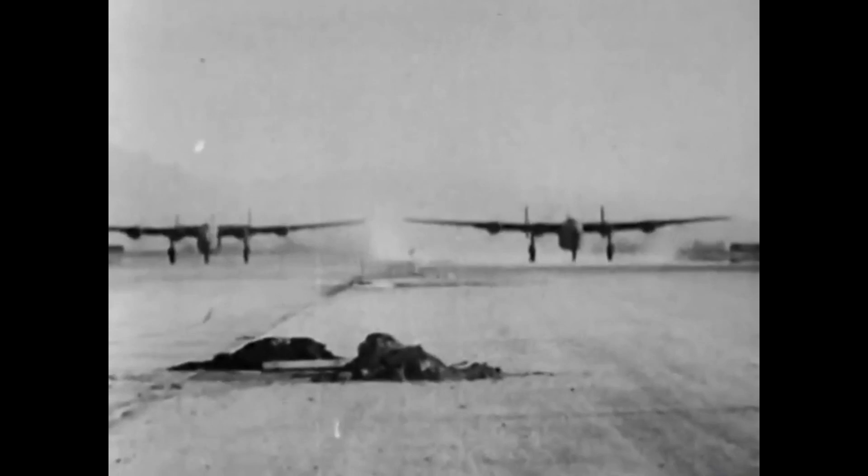A heavy bomber squadron takes off on a long-distance operation against the enemy. Flying with great speed at high altitudes, they avoid detection, drop their loads, and are off for home before enemy fighters and pursuit planes can possibly climb 25, 30,000 feet or even higher. In these cold substratosphere regions of the sky, where the air is so thin, it affects engines as well as men, the fastest enemy planes are no match for our B-17 or our B-24s, which return safely to their bases.

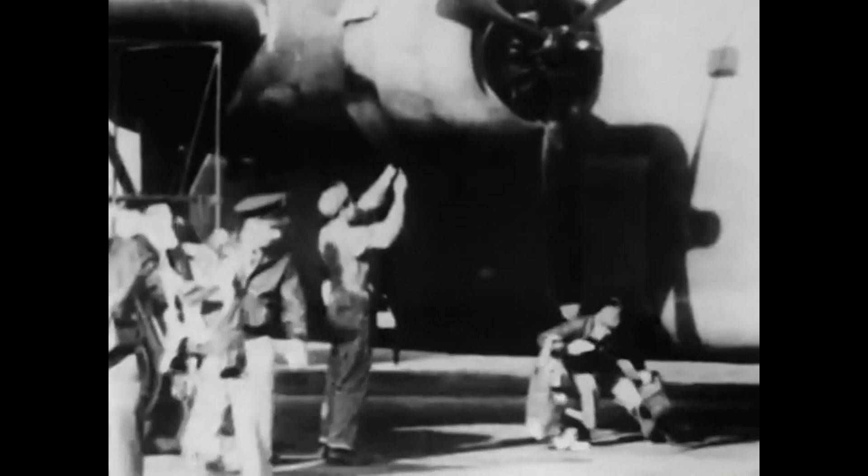Air supremacy is a vital factor, perhaps a deciding factor in this war. The achievement of air supremacy involves speed, personnel, firepower, and maneuverability.

But one of the most important factors is the ability to achieve maximum altitude without the loss of power. The Civil War maxim of getting there fastest with the mostest men can be revised in terms of military aviation to getting up higher with the mostest fighting power.

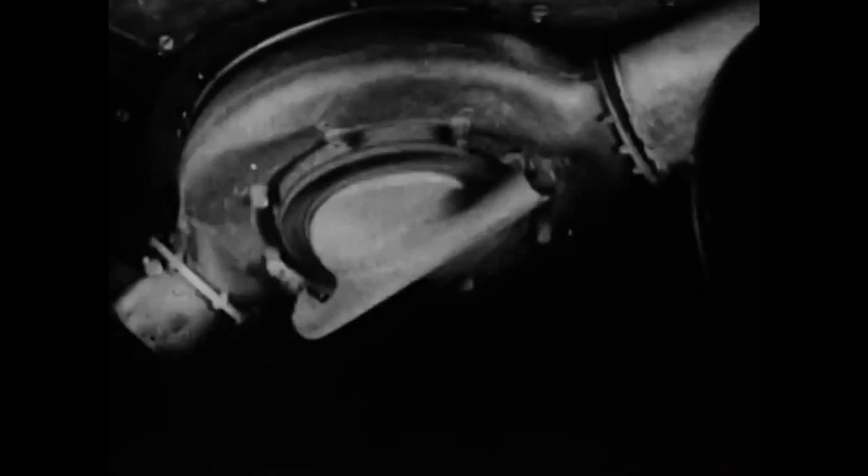This master of the skies, the dynamic turbo-supercharger, is the reason for our air superiority at high altitudes. For the year 1940, the Collier Trophy, one of the highest honors in aeronautics, was awarded jointly to Dr. Sanford A. Moss and the Army Air Forces for 25 years of collaboration in perfecting the turbo-supercharger, which is playing a leading role in sweeping our enemies to defeat.

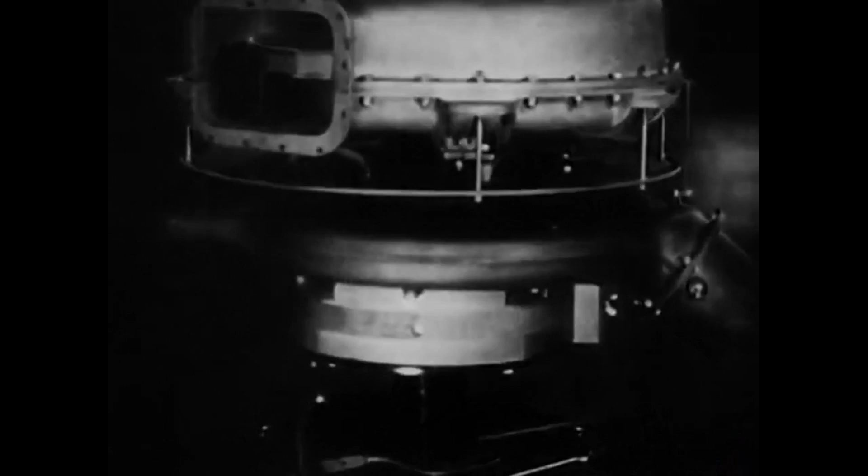The turbo-supercharger makes possible high-altitude flying with full engine power. An airplane engine derives its power from explosions of a mixture of air and gasoline. At altitudes above sea level, the air gets thinner and thinner. Therefore, these explosions get weaker and weaker.

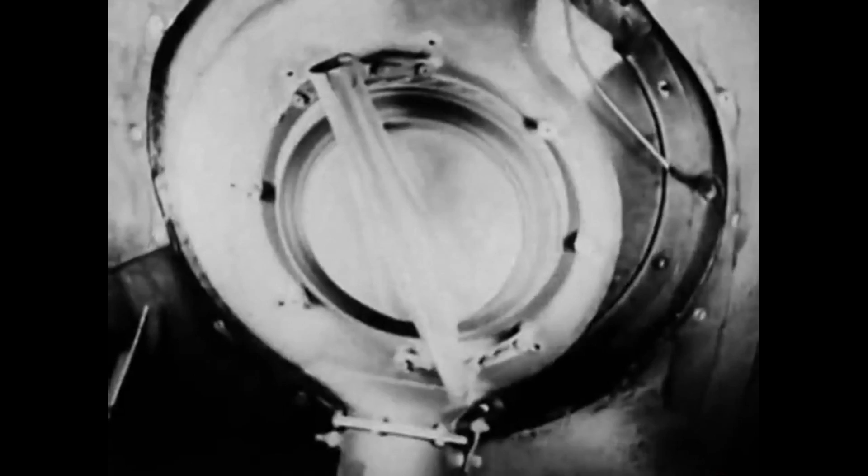At 20,000 feet, an unsupercharged airplane engine gives but one-half its normal power. At 35,000 feet, only a quarter of its power. The turbo-supercharger counteracts this loss of power by compressing and cramming air into the engine, thereby maintaining proper manifold pressure to give full power at high altitudes.

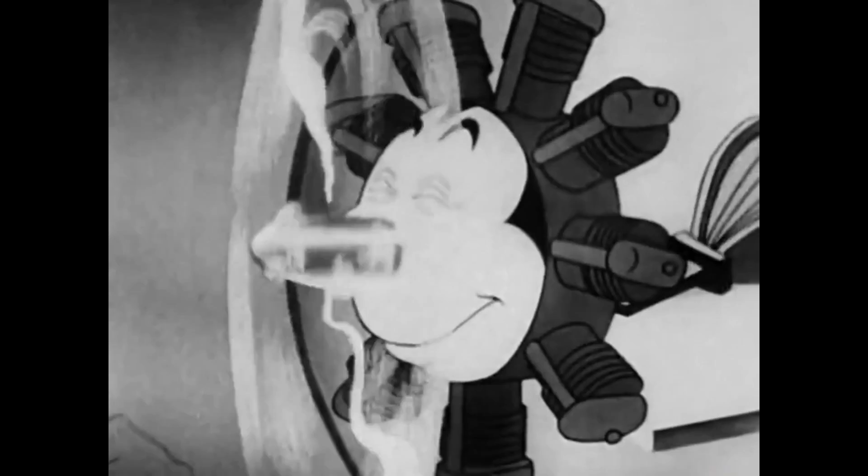It performs the same service for engines that oxygen equipment performs for pilots, kidding the engine into thinking it is always working at sea level. Without a turbo-supercharger, the engine gasps for breath.

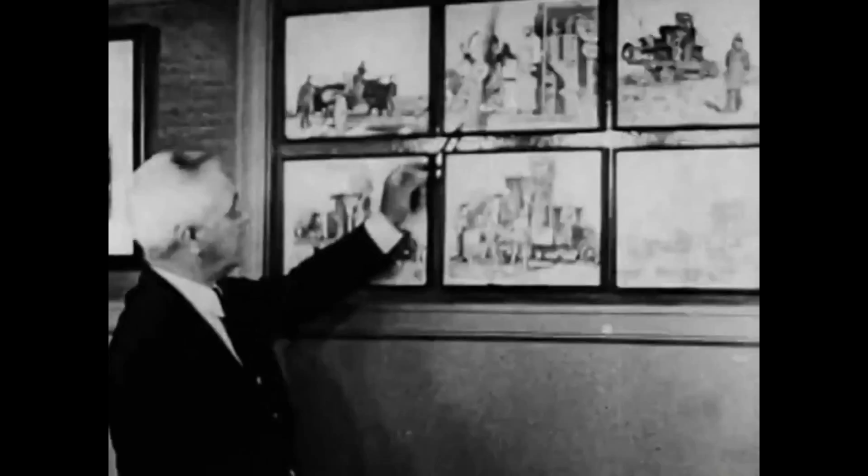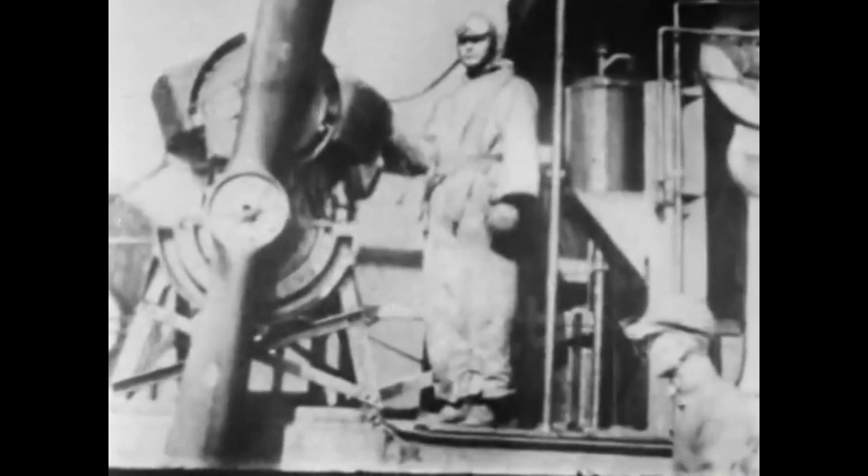During World War I, the first model turbo-supercharger was tested under great difficulty, on a truck at the summit of Pikes Peak, 14,100 feet above sea level. The Liberty engine developed 400 horsepower at sea level, but moving up to 14,000 feet, it dropped to 265 horsepower. Then the turbo-supercharger not only boosted it up to 400 horsepower, but to 410, or 10 more than normal at sea level.

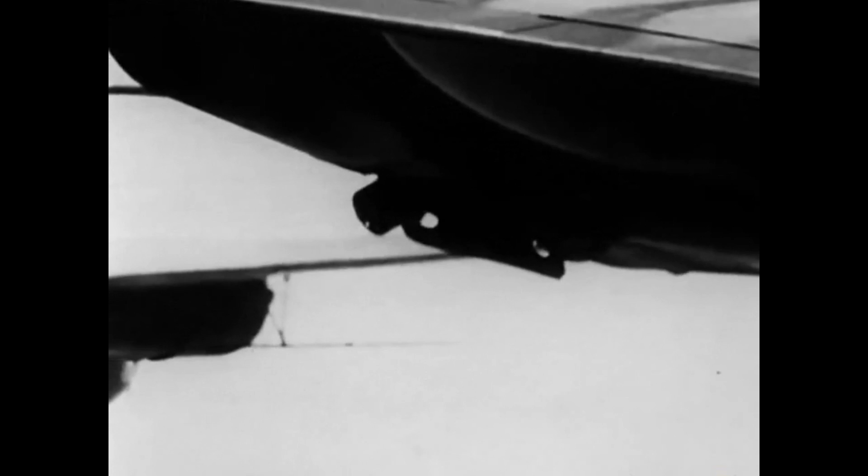The turbo-supercharger has demonstrated its worth in actual combat all over the globe. Our great bombers, the Boeing B-17 Flying Fortress and Consolidated B-24 Liberator, together with the Lockheed P-38 Interceptor, the P-43 Lancer, and the deadly Republic P-47 Thunderbolt, are all turbo-supercharger equipped, which enables them to fly and fight effectively at great heights above the earth.

Our turbo-supercharged interceptors and pursuits can get on top and stay on top of anything the enemy has to offer. These tactical advantages are the key to air supremacy and ultimate victory.

Turbo-superchargers permit our bomber pilots to avoid bad weather, even storms, by climbing over them, making it possible to fly at altitudes and speeds which result in maximum engine efficiency.

Obviously, we have a decided edge when we can bomb the enemy with a minimum of danger to our planes and personnel. Flying turbo-supercharged planes, our boys have bombed enemy objectives with amazing accuracy from heights where they were invisible and unheard from the ground. There had been no warning sirens, no opportunity to take shelter, only the sudden, supreme, and paralyzing flash of falling out of a clear sky.

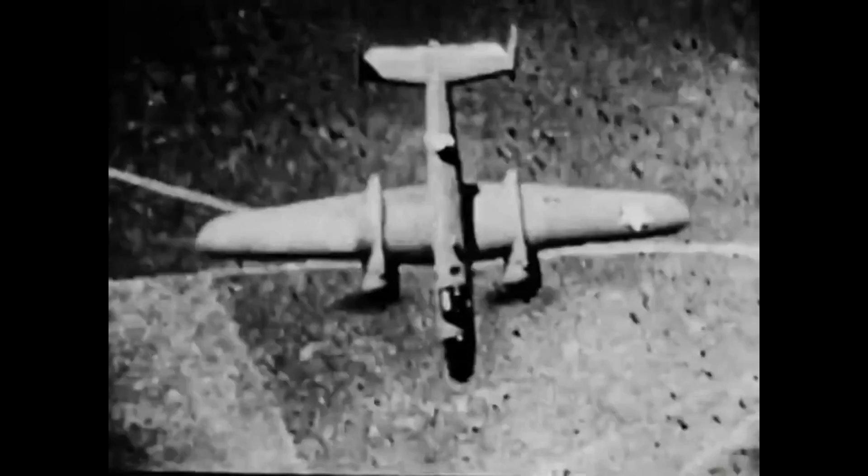All combat planes are equipped with gear-driven superchargers, which are built into the engines and driven from the engine crankshaft. These geared superchargers are effective up to medium altitude.

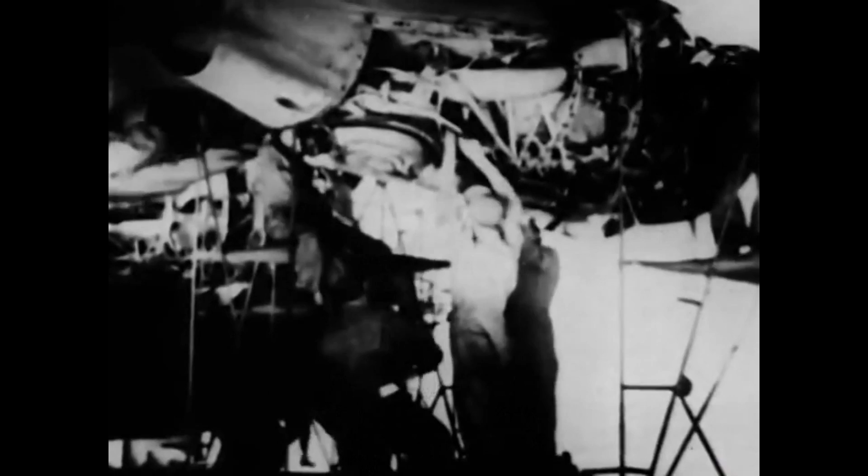At high altitude, the turbo-supercharger is needed to provide additional pressure to maintain full engine power. With proper care in installation, maintenance, and operation, the turbo-supercharger is extremely effective, reaching its full power and efficiency at 25,000 feet or higher.

This is the turbo-supercharger installation in the B-17. Installations vary according to the different types of ships, such as the B-24, the P-38, the P-43, and the P-47, where it is submerged in the fuselage.

A turbo-supercharger is driven by the terrific impulse of hot exhaust gases from the engine. It largely uses waste power.

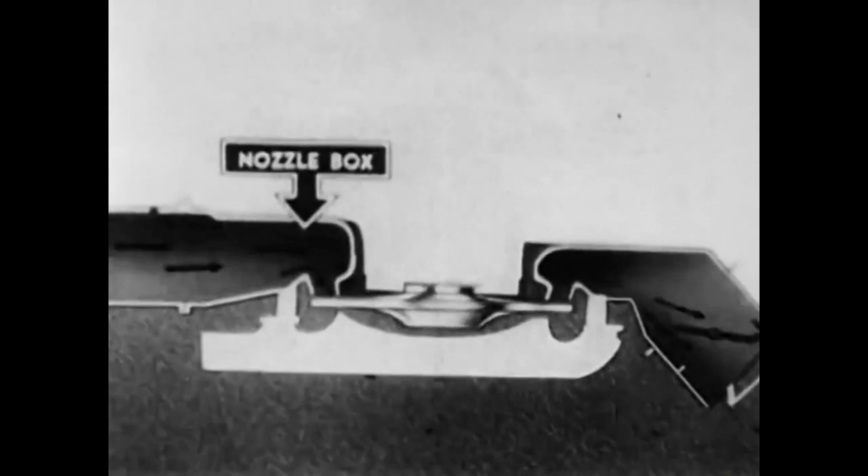Waste exhaust gases pour into the nozzle box, where they are directed onto a metal windmill or turbine wheel at 1,500 degrees Fahrenheit, with all the red-hot energy that implies.

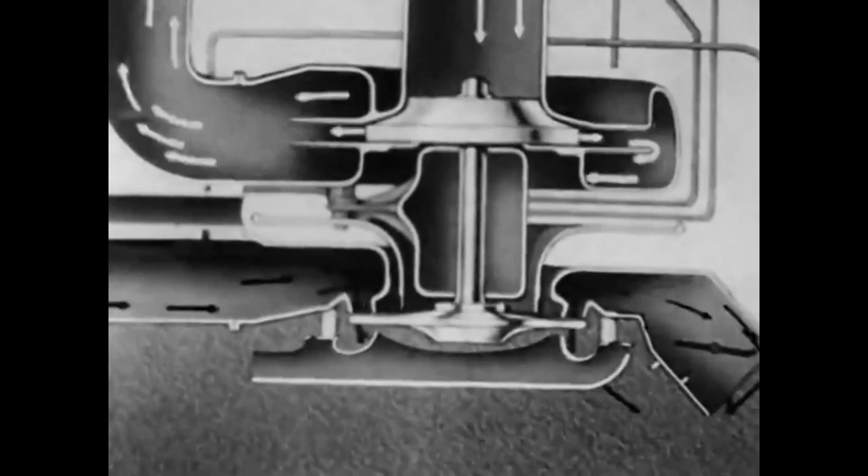This blazing force spins the turbine wheel at terrific speeds, up to about 20,000 revolutions per minute. The turbo-supercharger stands the gaff of almost impossible high-speed strains and stresses, and still performs its task at temperatures ranging from 1,500 degrees above to about 67 degrees below zero Fahrenheit.

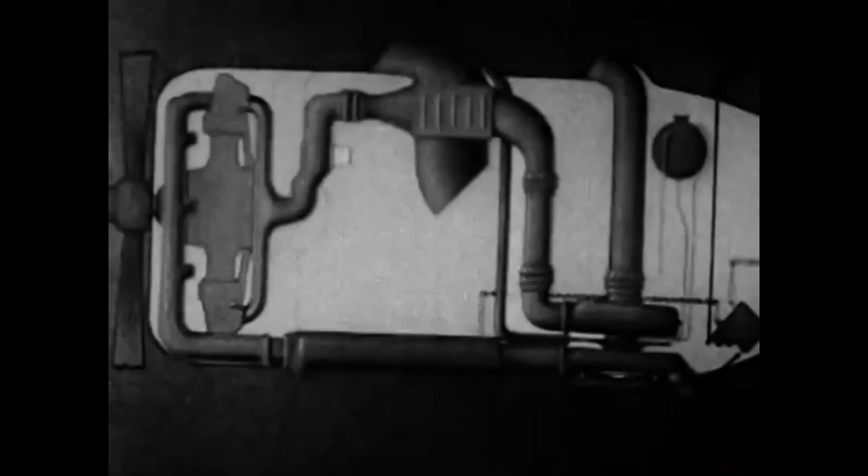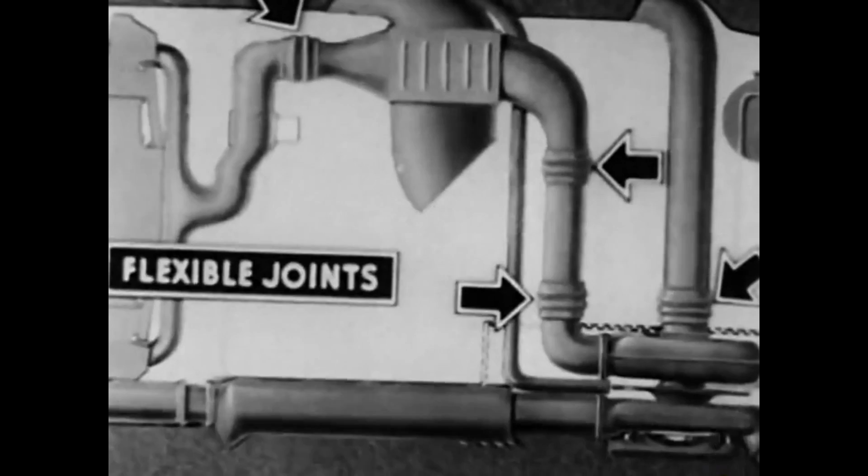The basic principle of all turbo-supercharger installations is outlined in this diagrammatic drawing. Flexible joints are installed between the component parts to absorb vibration.

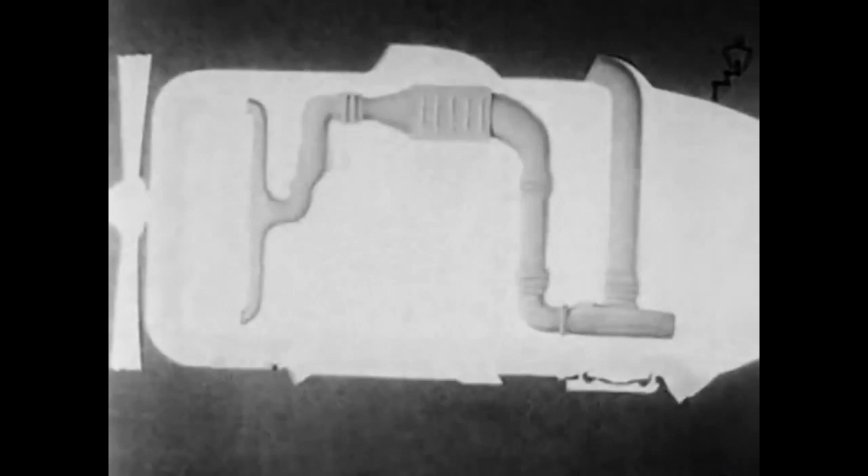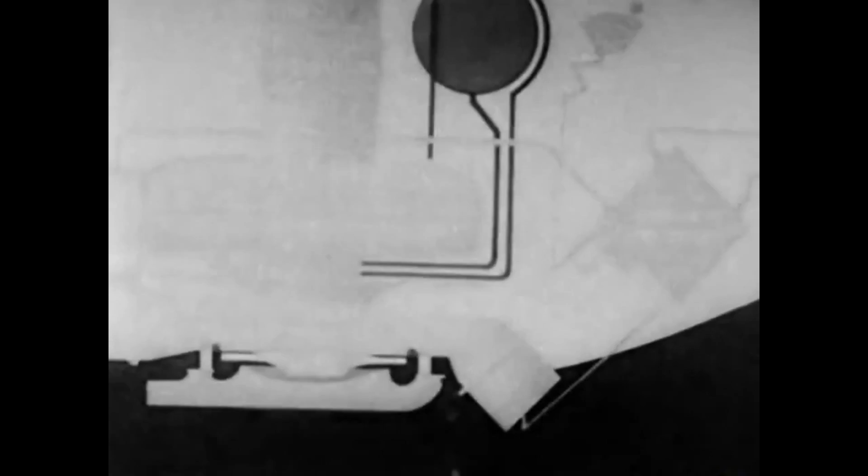For purposes of clarity, we will divide the system into 5 parts: 1, the induction system. 2, the exhaust system. 3, the ventilating or cooling system. 4, the control system. And 5, the lubrication system.

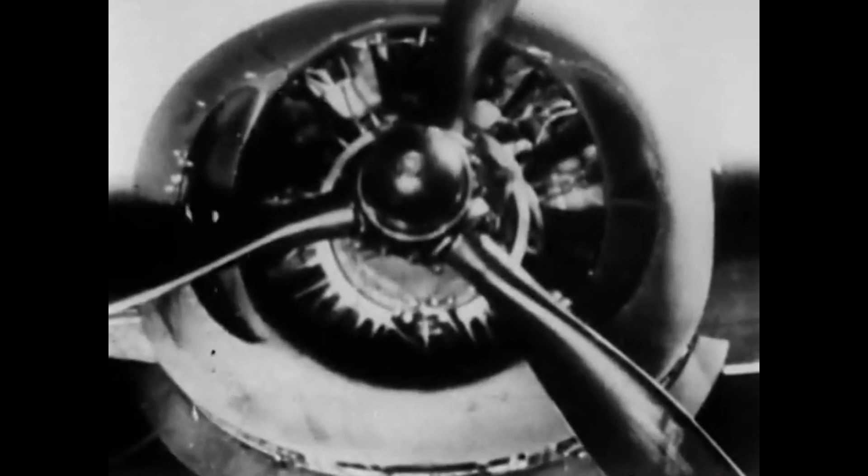Individual installations vary according to the different design of ships, but their functions remain the same. The induction system comprises rammed air intake in the engine nacelle or in the leading edge of the wing. The speed of the plane rams air into these intakes and assists in keeping up pressure.

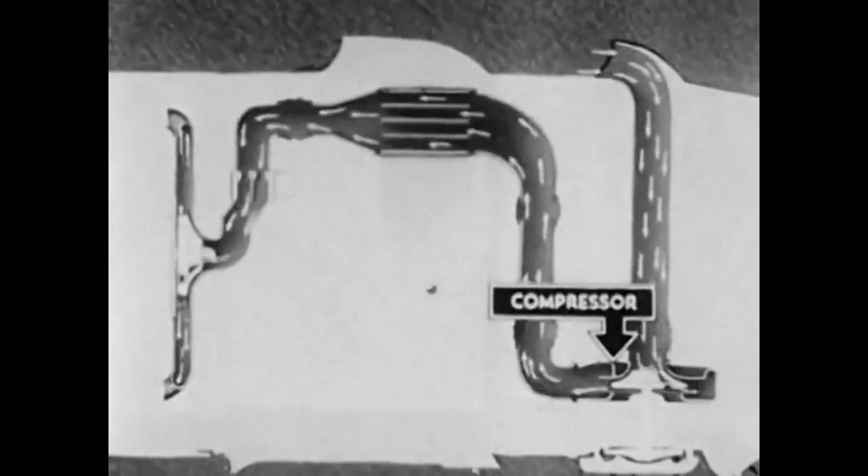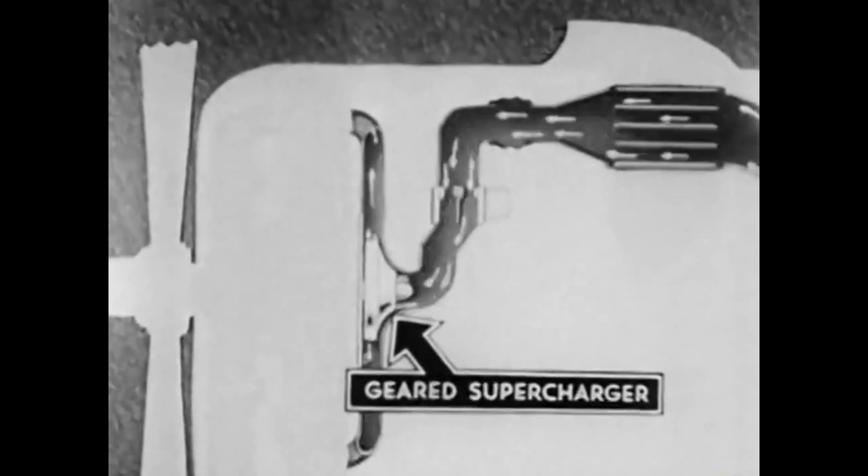Ducts carry this air to the compressor, where it is compressed and forced through the intercooler, and the carburetor to the inlet of the geared supercharger. The geared supercharger is used to do part of the required supercharging and to improve the distribution of the fuel charge to the cylinders.

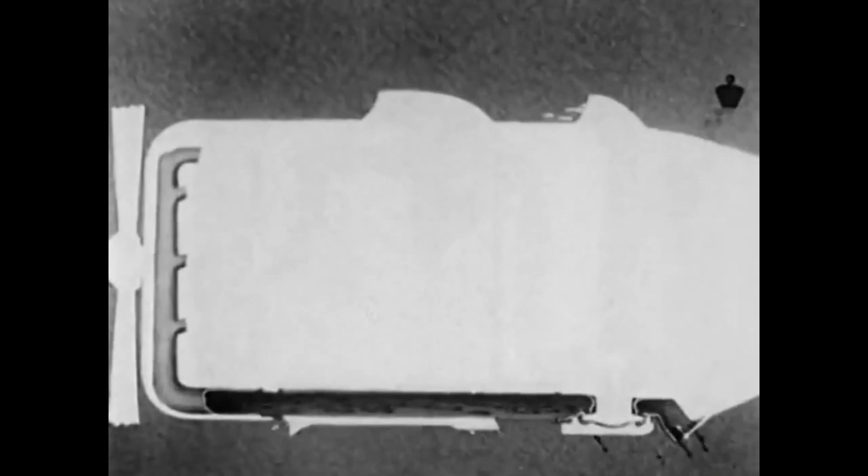The exhaust system takes the high-temperature exhaust gases from the engine to turbine wheels, or out through the wastegate to the atmosphere. The cooling or ventilating system cools the supercharger parts, thus preventing damage due to the high-temperature exhaust gas.

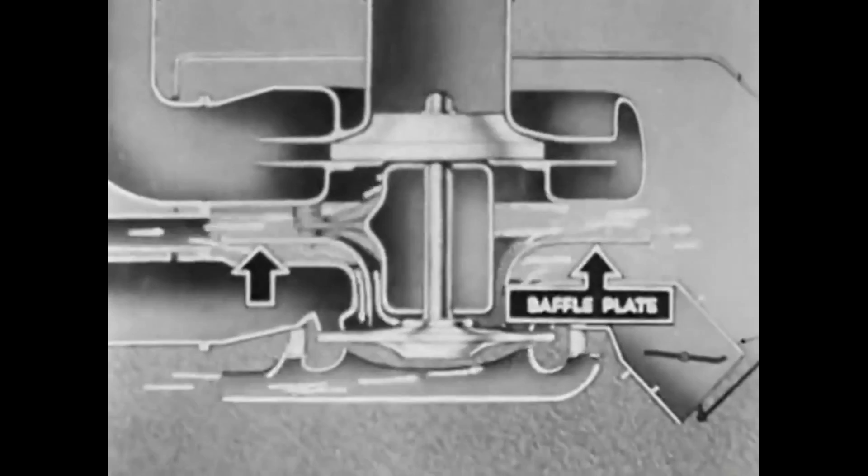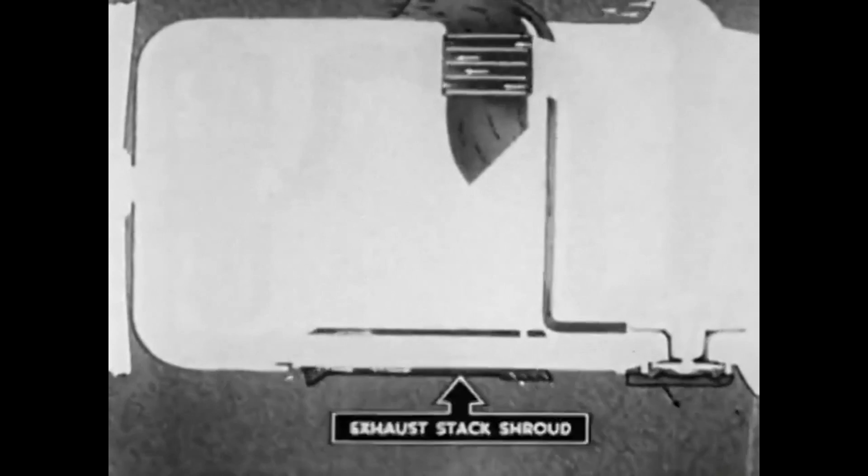Rammed air is carried through ducts to the turbo, where the stream is split by the baffle plates and cool air forced against the bearing housing, compressor casing, the back of the turbine nozzle box, and the back of the turbine wheel. Other ducts perform the same functions in relation to the exhaust stack shroud, which insulates the exhaust stack.

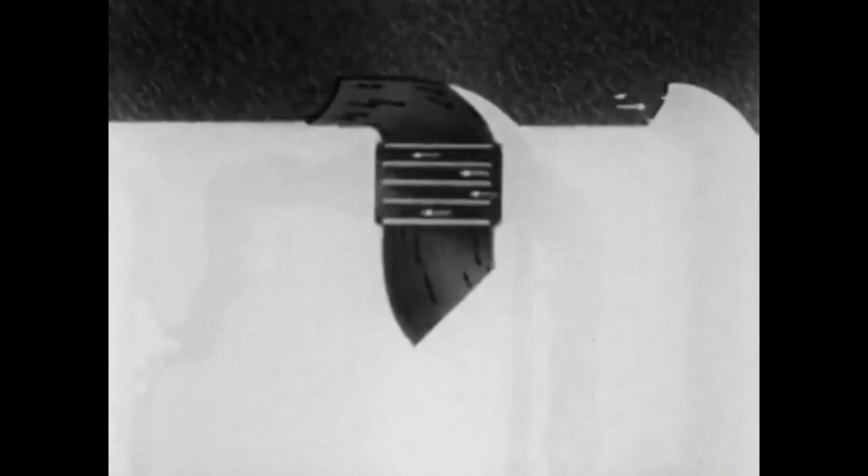And the air intercooler, which for proper combustion reduces the temperature of the air fed from the compressor to the engine. The intercooler cools air in the same way the radiator on your car cools water.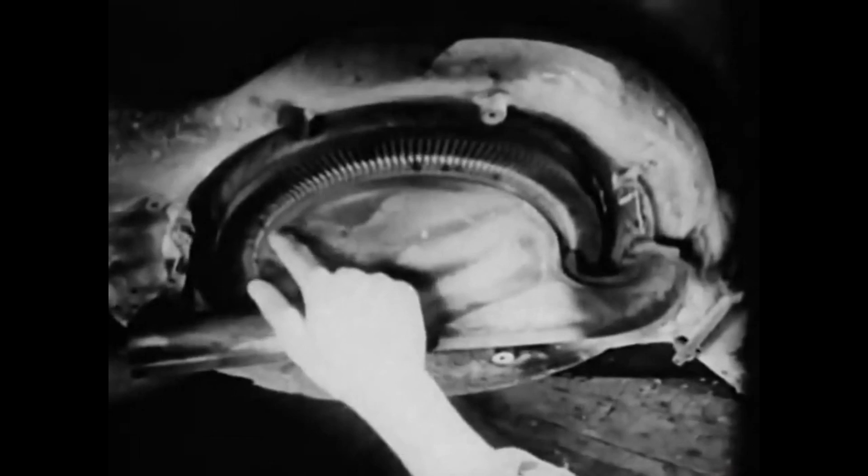The cooling cap supplies air to the rim of the turbine wheel to lower temperature of the wheel disc.

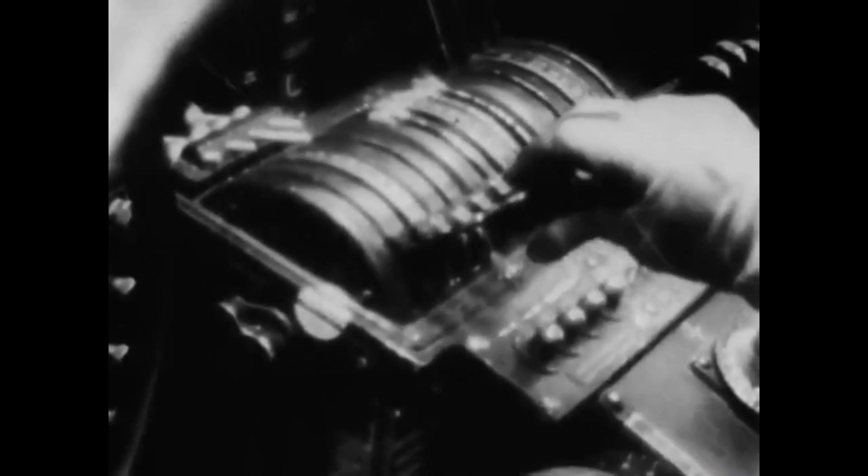The turbo-supercharger is controlled by a hydraulic regulator, which operates the wastegate in response to pressure changes in the exhaust stack. The wastegate control is adjusted by a boost lever in the cockpit. The wastegate controls speed of the supercharger by bypassing the gases around the wheel.

With the wastegate open, the turbine will idle. Closing it by degrees enables the turbo-supercharger to operate at required speed.

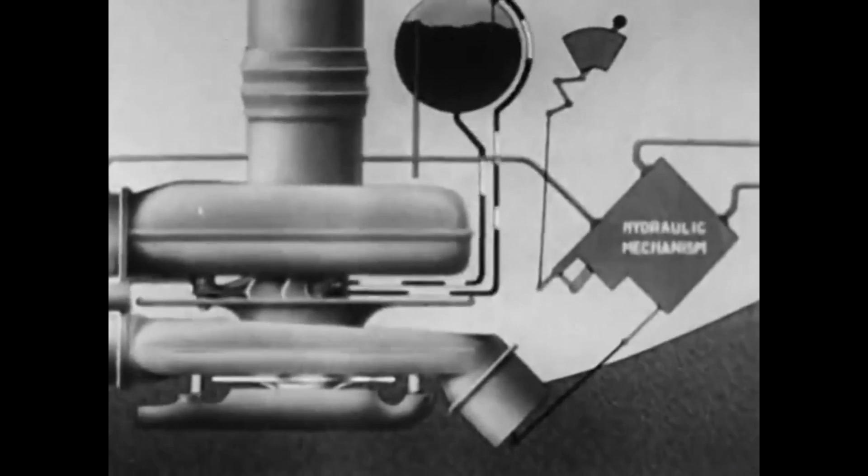Lubrication is accomplished by a gear-driven pump. One element of the pump takes oil from the tank and supplies it under pressure to the moving parts. The second, or scavenging element, returns the oil to the tank.

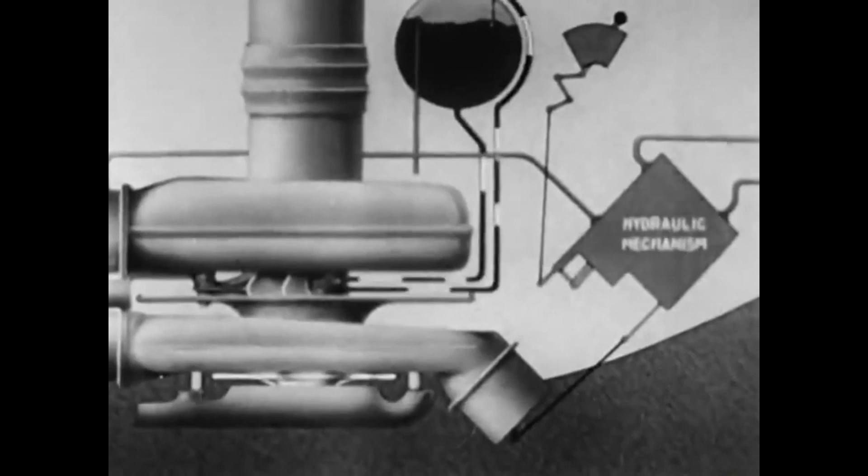When a ship comes in from a long, grueling flight, or even a routine operation, the pilot knows that the ground crew will assure the success of his next mission by a thorough inspection.

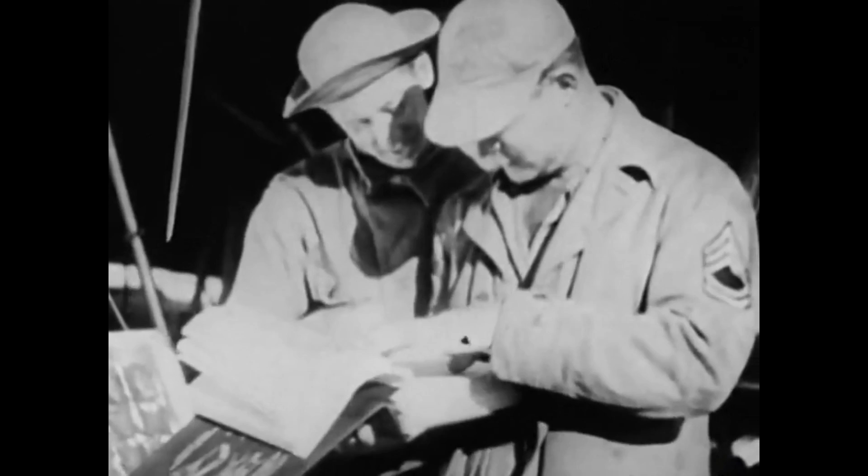The inspection of the turbo-supercharger installation is performed in accordance with Army Air Force's technical orders.

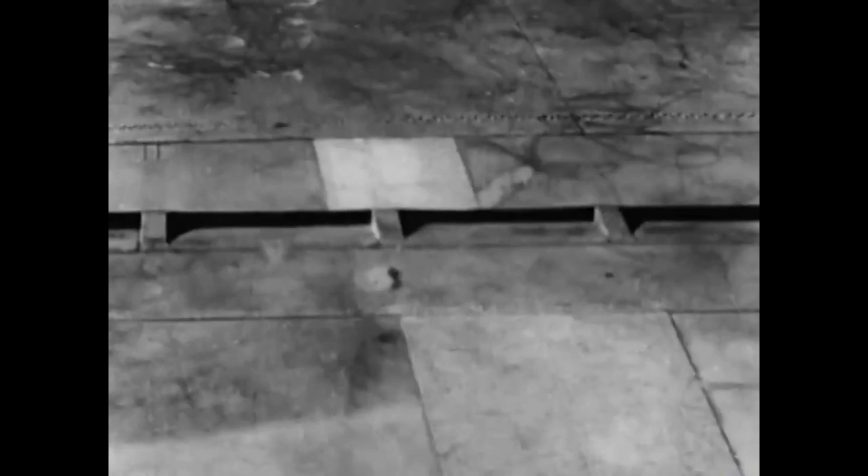Air ducts running from the nacelles or from the leading edge of the wing must be kept clear at all times. A piece of newspaper in a ram air duct will choke off cooling air, which is absolutely necessary for proper performance. Men are sometimes careless and step on louvers, blocking the flow of ventilating air. Ducting must be examined for broken connections, cracking, and chafing.

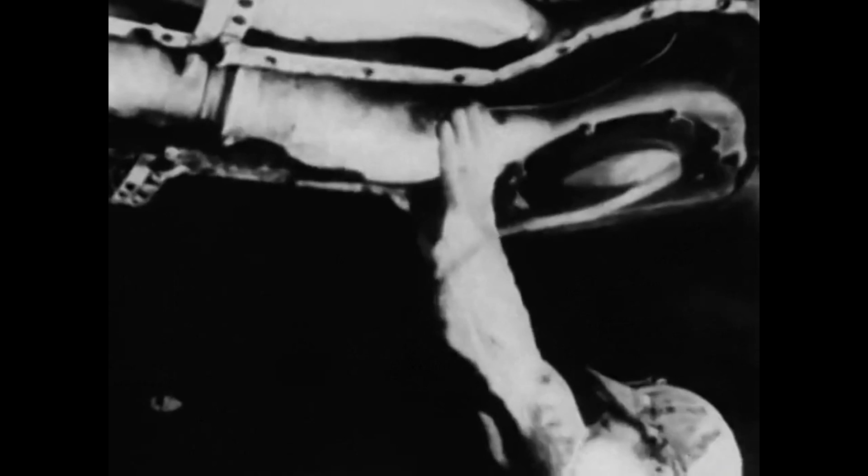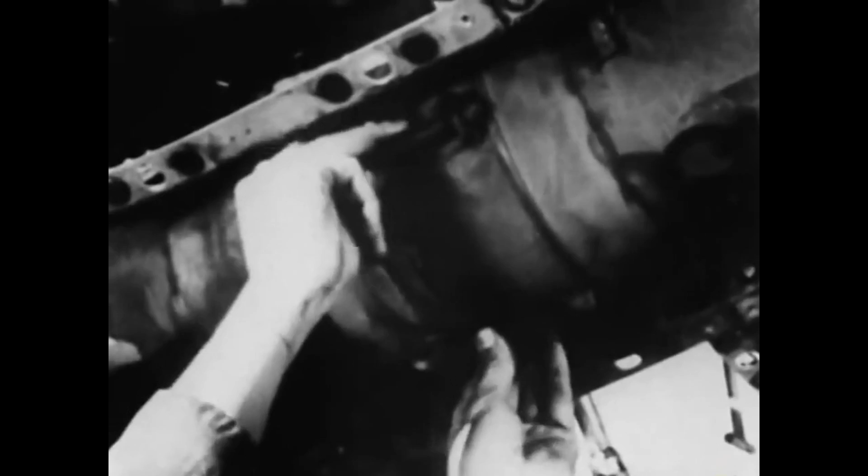The exhaust system is equally as important as the air feed. All joints in the exhaust system must be inspected for gas leakage, with special attention to flexible joints. Look for signs of overheating and leaks around exhaust piping. One small leak might rob the engine of that vital extra few miles an hour which marks the difference between victory and disaster. Leakage can be detected when the engine is started.

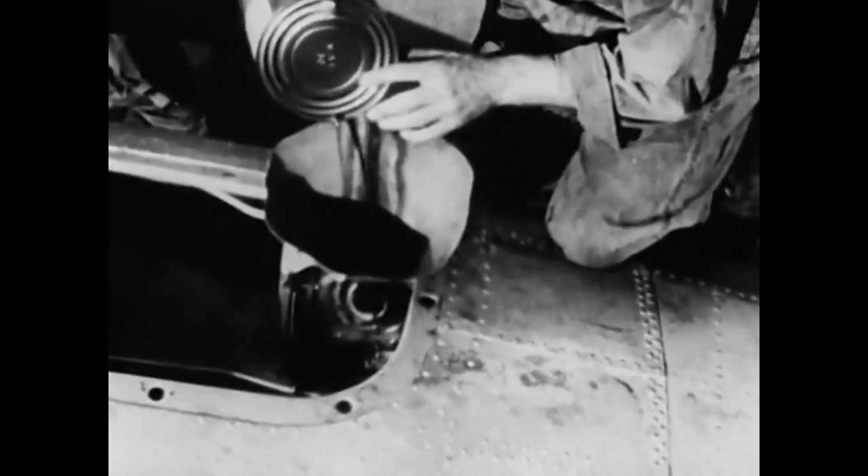In the lubricating system, check oil level in the tank. Keep all foreign matter out of oil. Note and record excessive oil consumption. Keep oil tank vents clear. Report signs of oil foaming or mist. Inspect all pipelines and connections, including the turbo-supercharger regulator, for oil leakage and security.

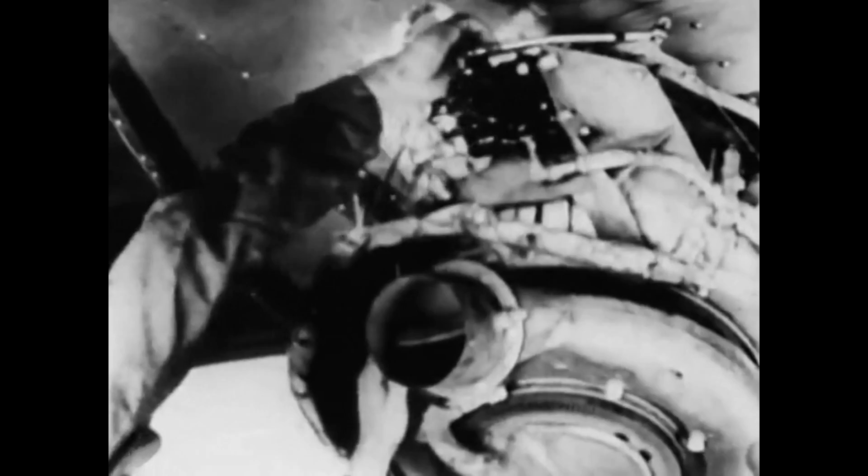When inspecting the control system, check free movement of the regulator in relation to open and closed positions of the wastegate. Check free movement of boost control in the cockpit. Be sure the turbo regulator locking device operates correctly.

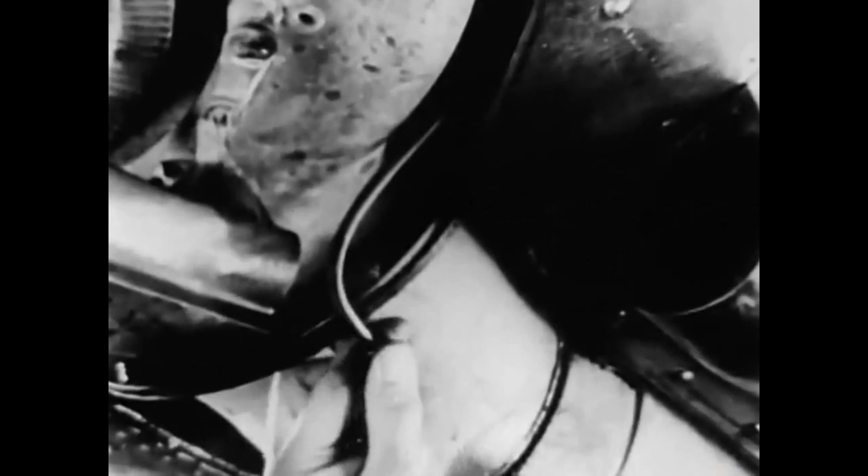The pressure regulating pipe should be disconnected at both the exhaust manifold and regulator. Blow air through and record any water condensation, carbon, or other foreign matter. Water will freeze and foreign matter will clog the pipe. Test the pipe to make sure there is no leakage. See that the regulating pipe orifice in the exhaust manifold is free from carbon or corrosion.

Inspect the turbo-supercharger to see that it is firmly in place. Inspect the nozzle box for deformation or cracking. Turn the turbine wheel by hand, feeling for any obstructions or tight spots. Listen closely for strange noises or rubbing, which might be caused by foreign matter on the back of the wheel. Examine the wheel for signs of overheating. Inspect buckets for alignment and deformation. The cooling cap is always taken off and is replaced by a cover cap to protect the turbine wheel.

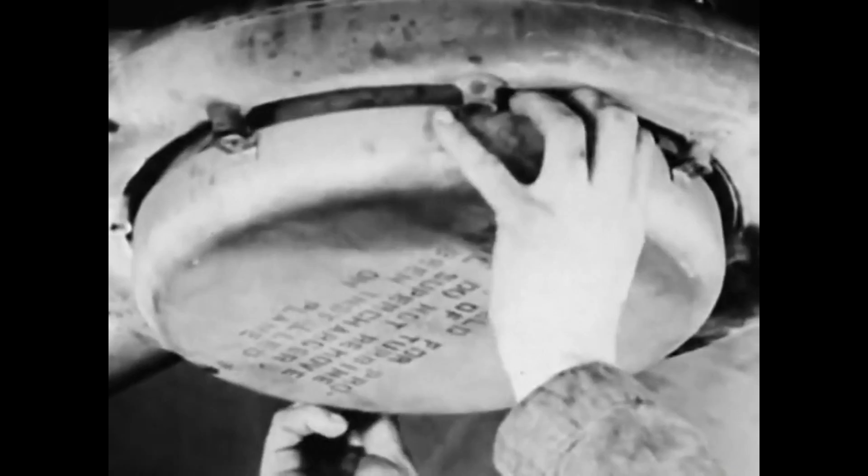The turbo-supercharger is carefully lowered from the plane and starts its journey to the overhaul depot.

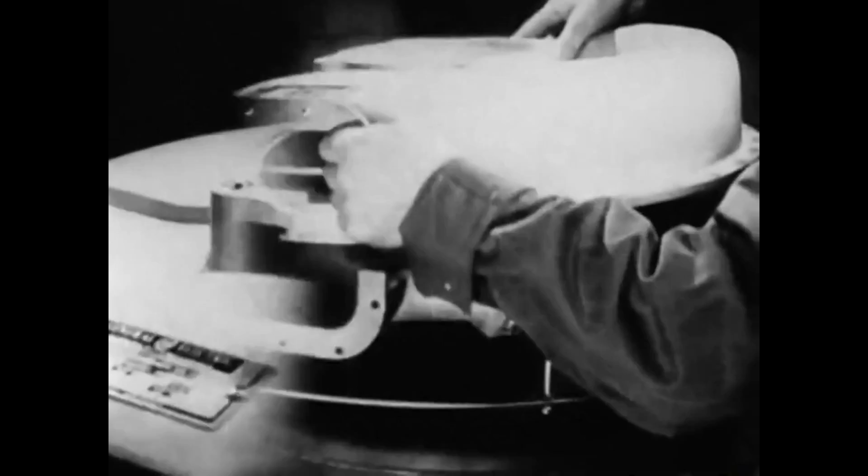At the depot, the supercharger is placed wheel down on a special stand for disassembly. After proper clearances are taken, the rear compressor casing and gasket are removed, revealing the impeller and diffuser. The impeller is on the same shaft as the turbine wheel and discharges air through the diffuser to the compressor casing, which collects the compressed air and feeds it to the engine.

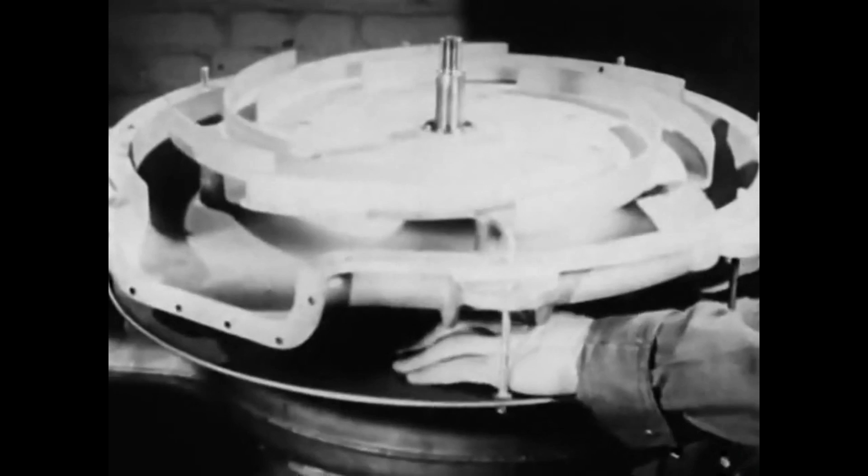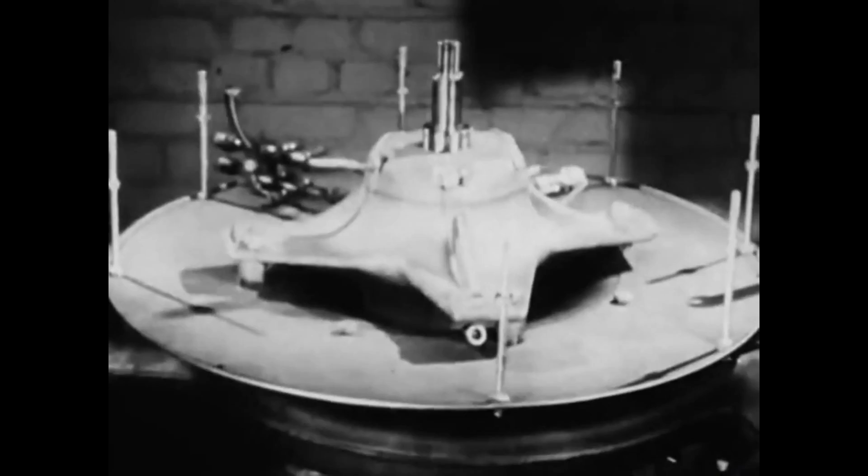After removing the impeller, the front compressor casing and diffuser are taken off as a unit. Note that we are working from rear to front, as the turbine wheel side is always called the front, regardless of position. This disassembly appears very simple. Actually, it is a long and careful process, which we will demonstrate by the more detailed removal of the rear bearing and its housing.

Safety wires are cut and the 3 retaining screws taken out. The rear bearing clamp washer is lifted off, and the same 3 retaining screws inserted in the threaded jacking holes in the flange of the rear bearing housing. Each of the 3 screws is turned a little at a time, one after another, thus evenly jacking out the rear bearing and housing. The rear bearing is a ball bearing.

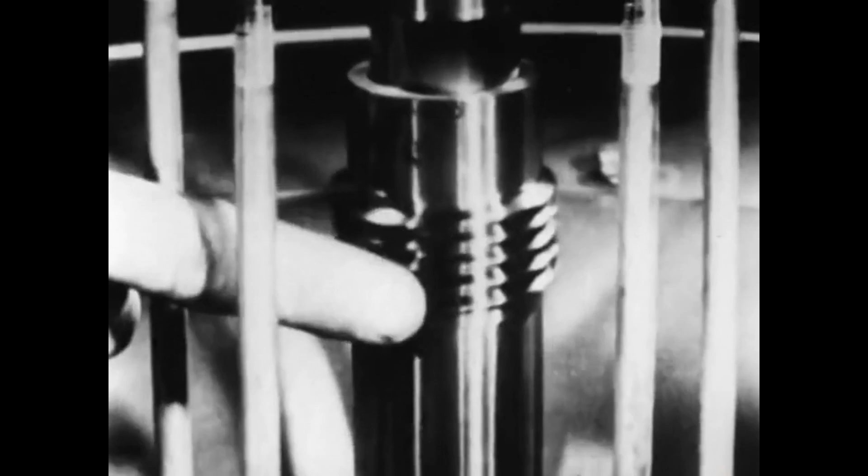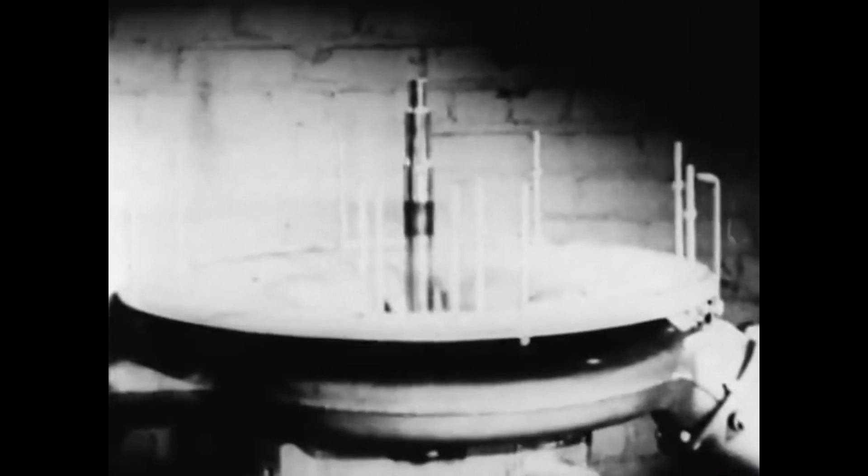Next, the bearing and pump casing is removed. The oil pump is operated by this drive sleeve, which is locked onto the shaft with the Woodruff key. Then the front bearing, which is a roller bearing, is removed. The baffle plate is a radiation shield and also divides and directs ram cooling air against the bearing and pump casing, front compressor casing, the back of the turbine nozzle box, and the back of the turbine wheel.

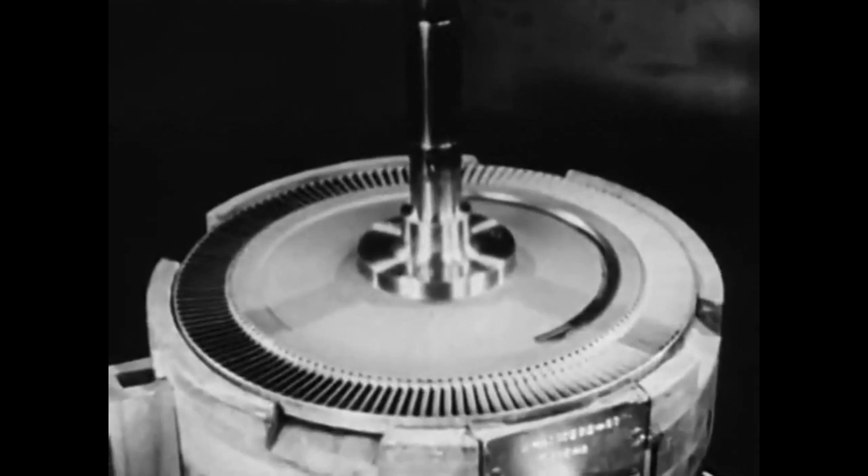A series of blades in the nozzle box directs the high-temperature exhaust gases onto the buckets of the turbine wheel. These buckets are separate blades driven into slots in the wheel.

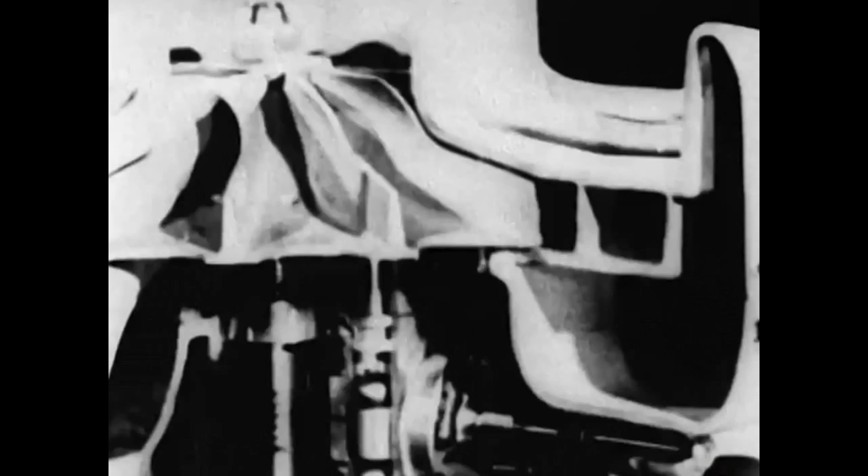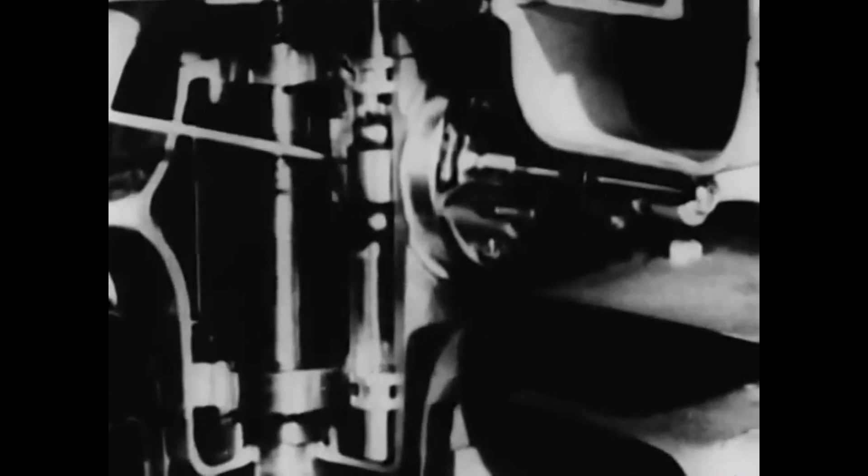During disassembly, 5 clearances are taken: 1, annulus. 2, blade side of impeller to rear compressor casing. 3, plain side of impeller to front compressor casing. 4, pump backlash. 5, between turbine wheel and nozzle box.

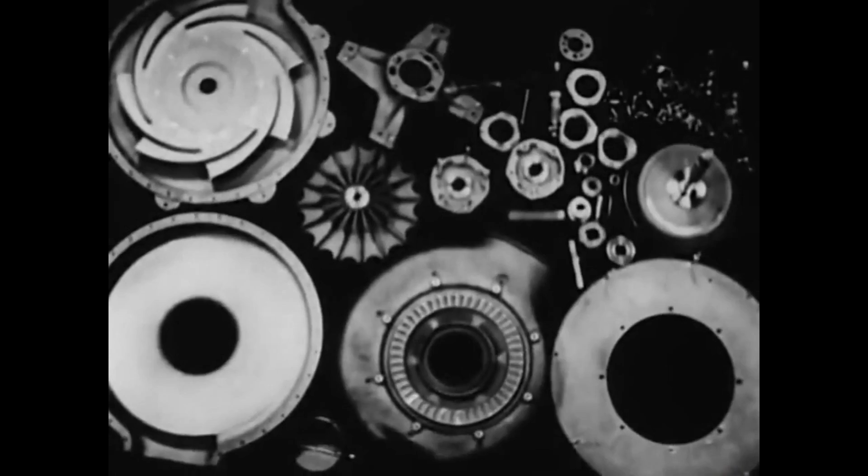Here are all the parts of a turbo-supercharger. The disassembly you have just seen in a minute or 2 actually takes a skilled mechanic several hours.

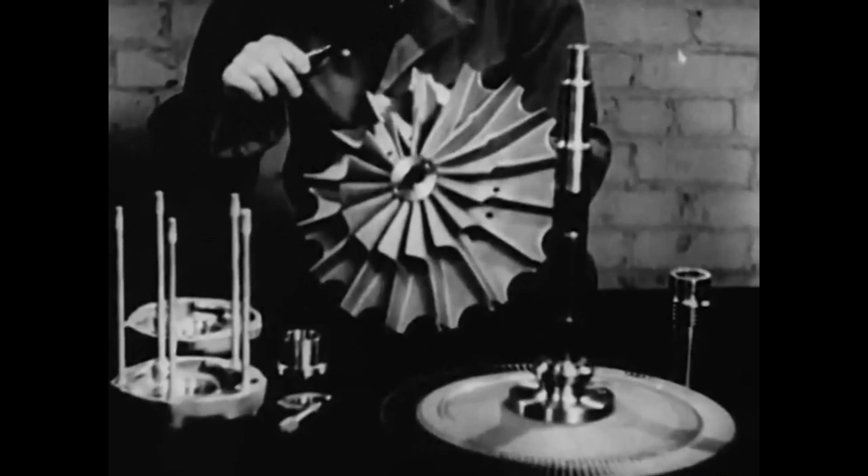After disassembly, careful inspection is made of all parts to determine those which are to be repaired or replaced.

One of the most precise repair processes is proper balancing of the rotor unit. This balancing is necessitated by even minute differences in the parts as placed on the rotor assembly.

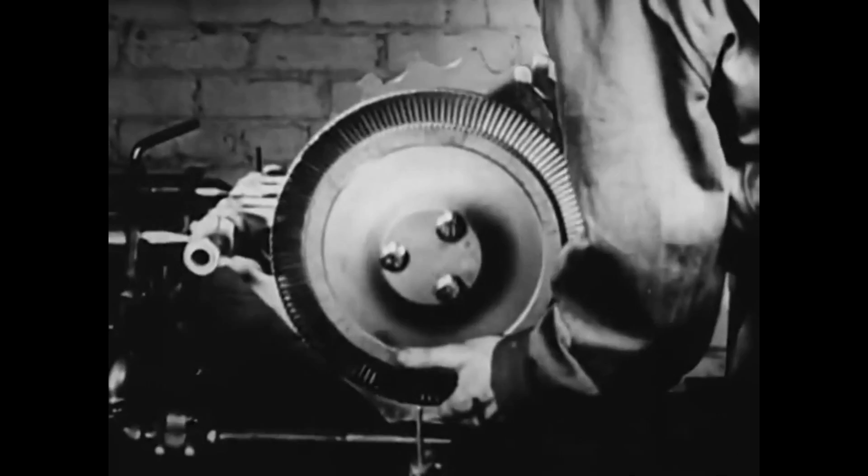The rotor unit is placed on the balancing stand where it is dynamically balanced. Running at speeds in excess of 20,000 RPM, and in any position which the plane flies, calls for more delicate balancing than a fine watch.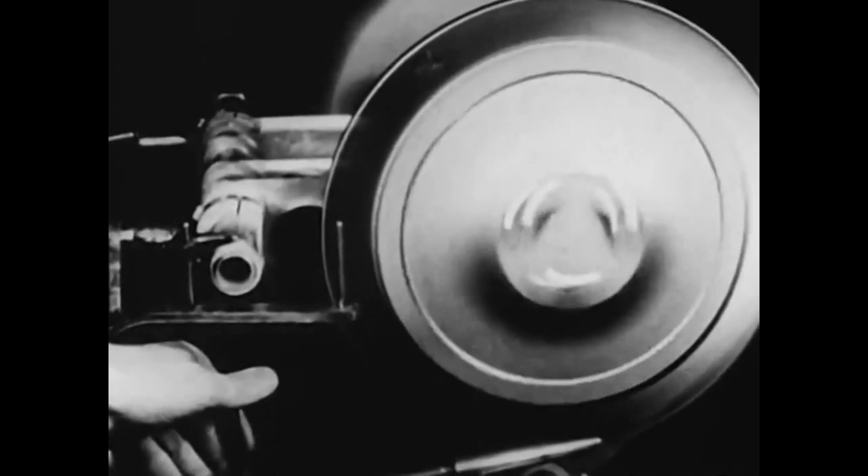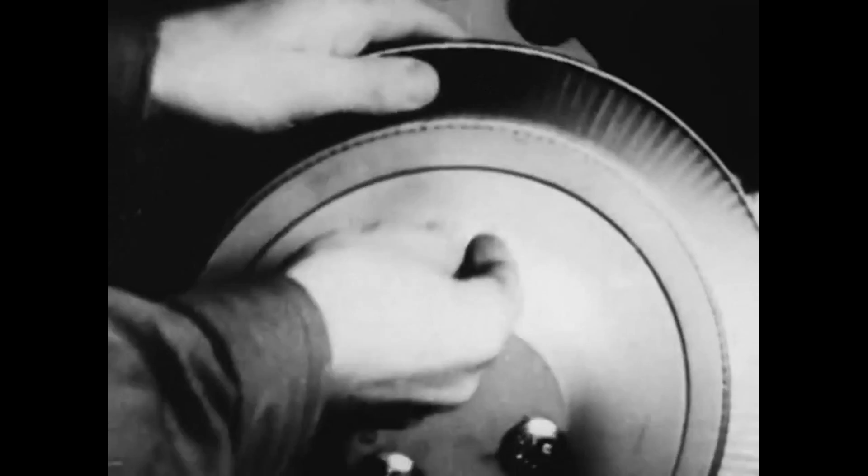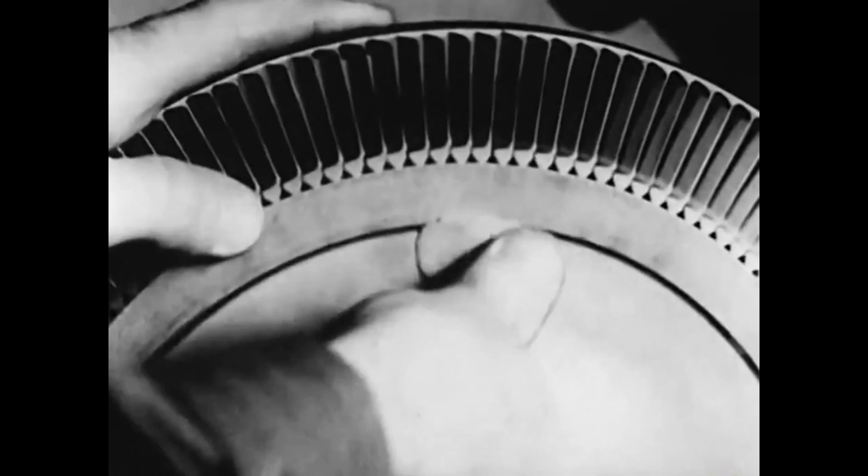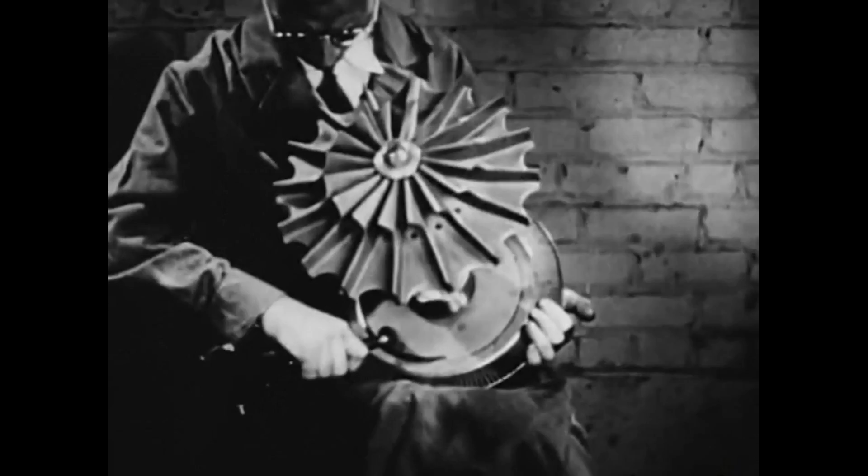A daub of clay is placed on the wheel, then shifted to find the point at which vibration becomes negligible. Then, from the diametrically opposite side of the wheel, enough metal is removed to offset the weight of the clay.

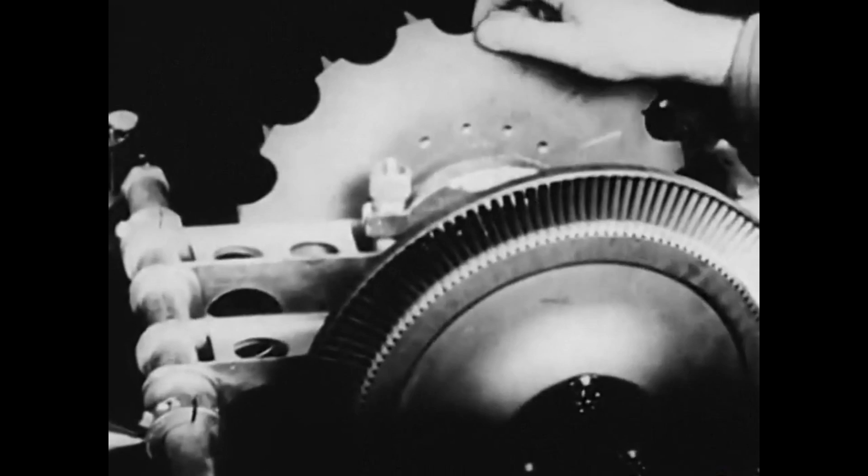The same balancing procedure is used on the impeller end of the rotor unit, and enough metal is removed to balance the impeller.

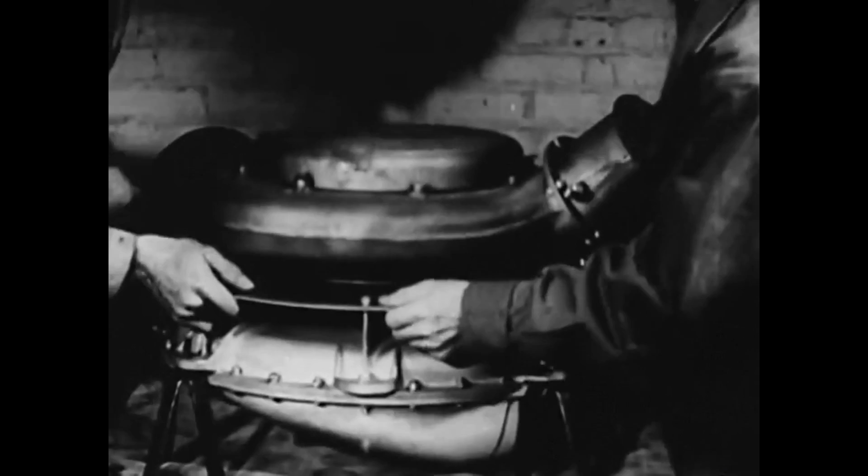After balancing of the rotor and assembly of the supercharger, it is ready to be returned to the flying field.

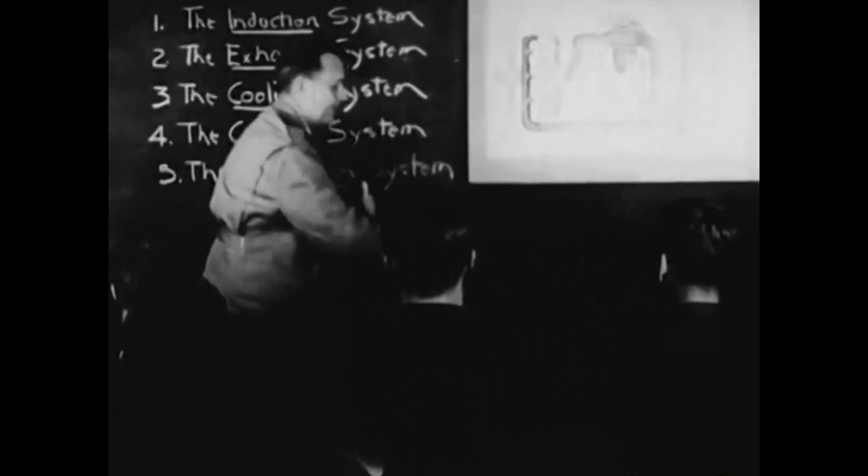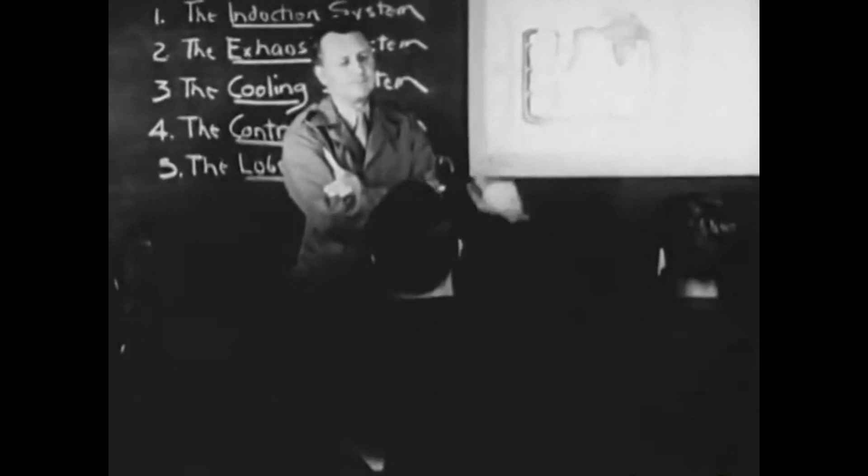Like every other part of a modern military airplane, the turbo-supercharger must be understood by pilots, who should remember important instructions regarding control. Before starting the engines, be sure that the turbo-supercharger is in the off position.

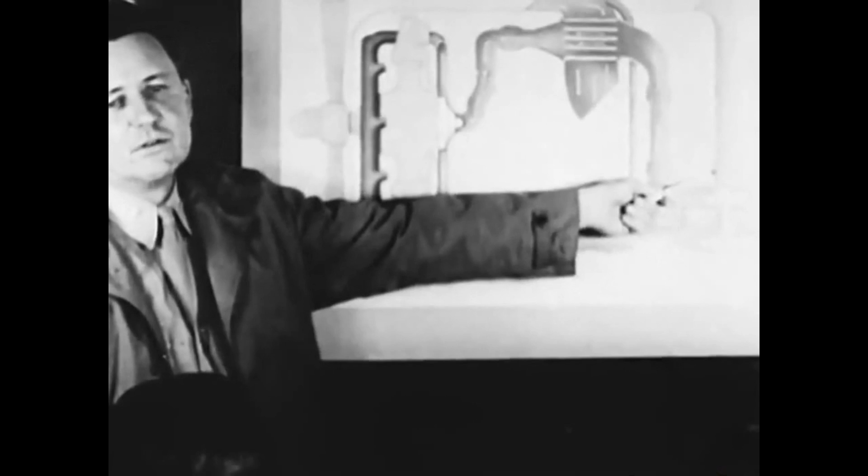No provision is normally made to supply engine air except through the turbo, its ducting, and intercooler. Therefore, considerable resistance will be imposed on airflow to the engine when the turbo regulator is in the off position.

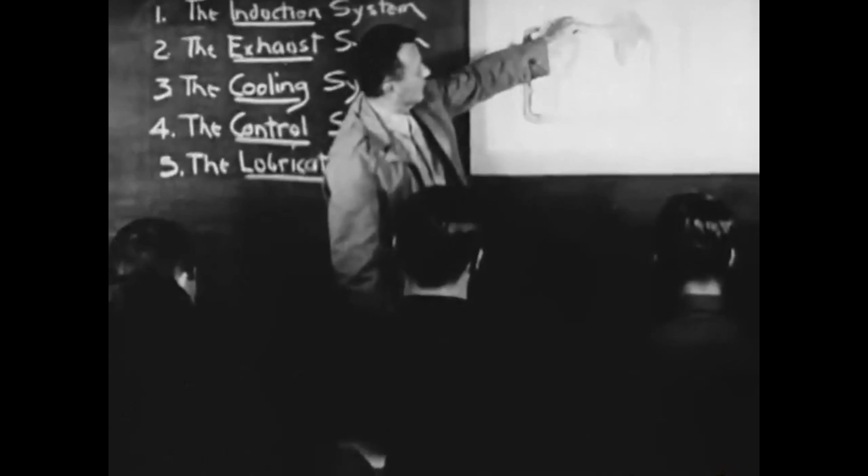In order to obtain sufficient manifold pressure for takeoff power, it is necessary on some airplanes to use a small amount of turbo boost. Close the wastegate a little.

Tactical requirements may dictate using military rated power for a period not exceeding 5 minutes. Climbs are usually made with about normal rated power. Small adjustment of the turbo control may be necessary during climbs to keep manifold pressure at desired level.

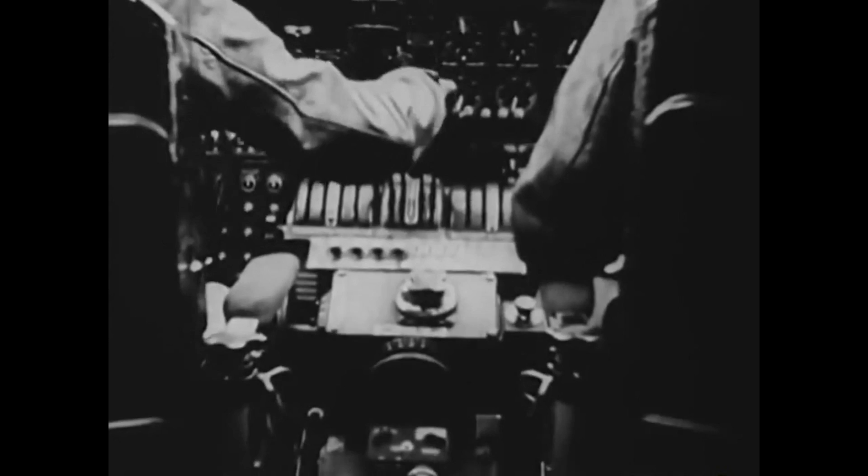For low altitude, low power cruising, when the geared supercharger is enough to provide proper manifold pressure, reduce engine throttle to maintain the desired manifold pressure. At high altitudes of more than 20,000 feet, it is not practicable to operate at very low engine speeds and power.

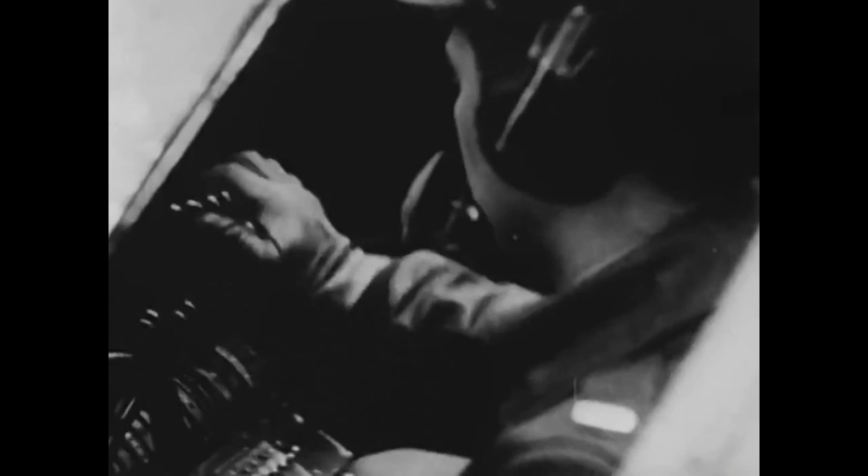Turbo-superchargers should be kept engaged at all times when induction system icing may be encountered. Above approximately 25,000 feet, manifold pressure should be reduced in accordance with the instructions given for each type of plane, to avoid overspeeding the turbo-supercharger.

For gliding and approach for landing, the turbo regulator is set approximately at maximum cruise position to ensure power to go around the field again if necessary.

The performance of ships equipped with turbo-superchargers is a matter of teamwork between ground crews and pilots. It is not necessary for a pilot to learn all the mechanical details of construction, but it is for him to know what he can expect from a turbo-supercharger when he needs its assistance to win the fight, save the lives of his crew and himself.

The men who fly these powerful planes are going to depend upon their turbo-superchargers in emergencies which will test all their skill, strength, and courage. Operation and control are largely automatic, but there are certain times when the pilot needs power and needs it instantly. These times occur under stress of actual combat conditions, and his reaction should be instinctive.

The pilot will depend upon this master of the skies to give him the edge of speed and maneuverability, which means the difference between defeat and victory in the sub-stratosphere regions of the sky.

It is with enormous pride in American scientific invention and mechanical ability we look at our interceptors in pursuit, which can get on top of anything that flies. It is with a feeling of grim satisfaction that we know our bombers are able to shoot down or escape from anything the enemy can put in the air.